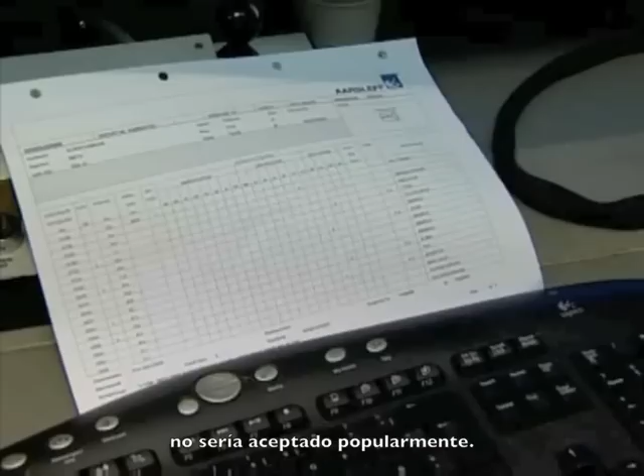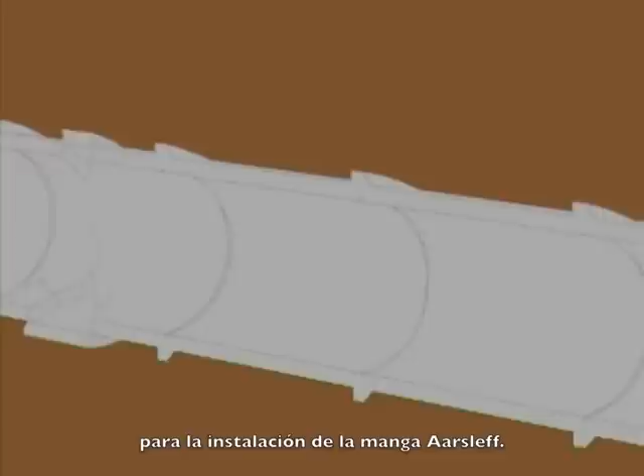Prior to the installation process, the old pipe is CCTV inspected, partly to detect where the lateral pipes are connected to the main pipe, and partly to check whether the pipe is clean and ready for the installation of the Aarsleff tube. The Aarsleff tube is suitable for no-dig rehabilitating wastewater and rainwater pipes, for example. The Aarsleff tube is suitable for rehabilitating pipes ranging from 100 mm to 2500 mm in diameter.

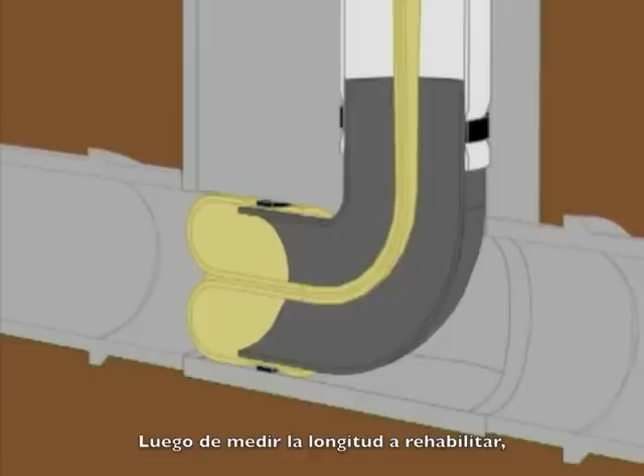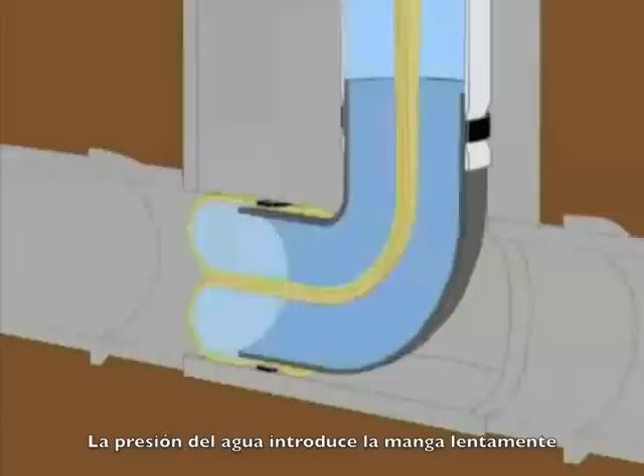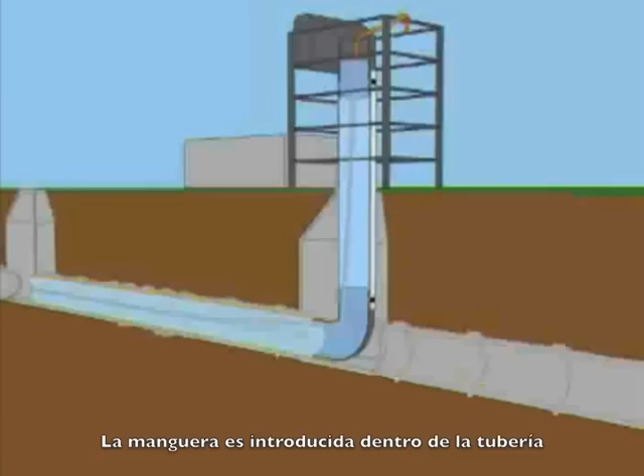In this case, the pipe is rehabilitated from manhole to manhole. After measuring the length to be relined, the impregnated tube is inverted into the damaged pipe. This is effected by water. The water pressure inverts the tube into the old pipe at a steady pace. A rubber hose is installed inside the tube for the hot water curing process. The hose is inverted together with the CIPP tube into the host pipe.

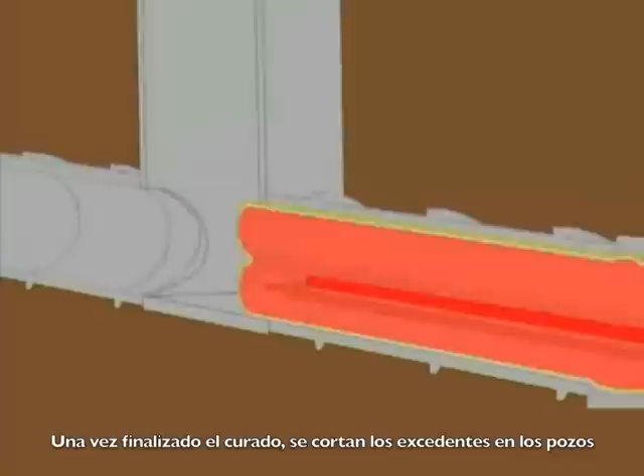Once the tube is in place, it's cured. The water is heated in the on-site boiler by means of circulation. When curing is complete, the excess tube ends are cut off inside the manholes and the old pipe is lined internally with a CIPP tube with a strong and smooth surface that will last for many years.

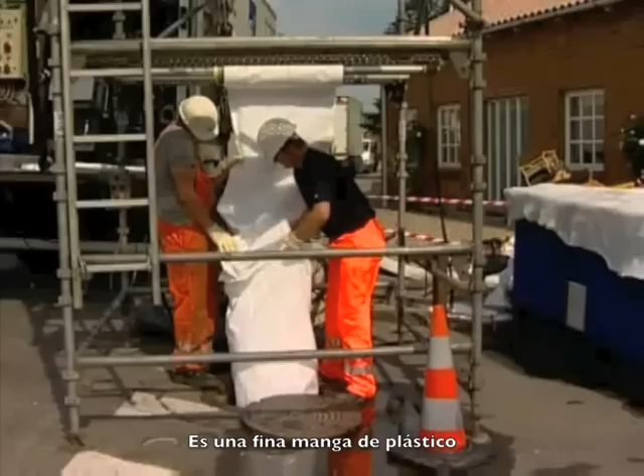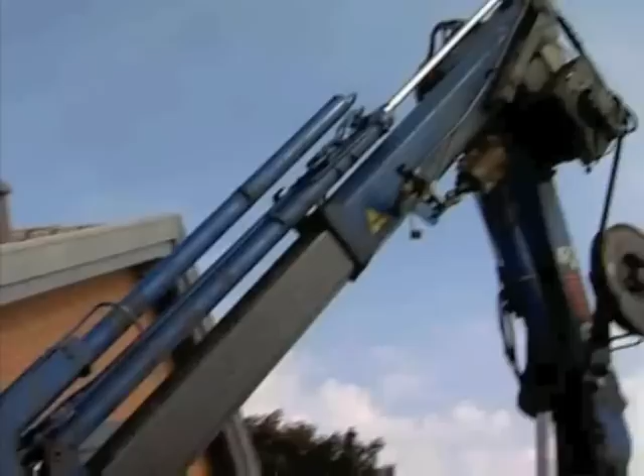First, a pre-liner is blown into the old pipe. It is a thin plastic tube that protects the following polyester tube against groundwater during the inversion and curing. The pre-liner is shown here on its way through an intermediate manhole to the end manhole. The tube was delivered to the site in a crate filled with ice to prevent premature curing.

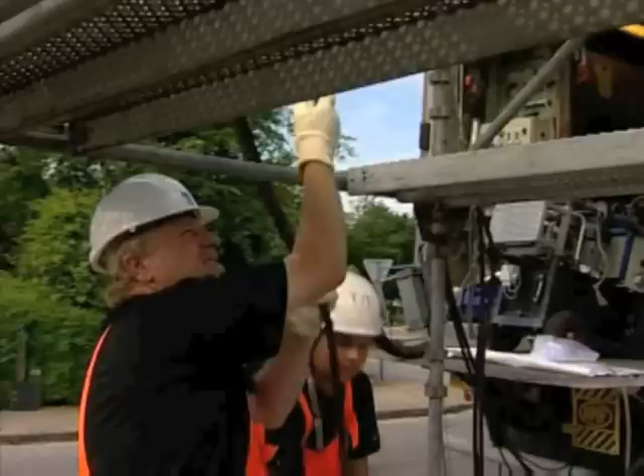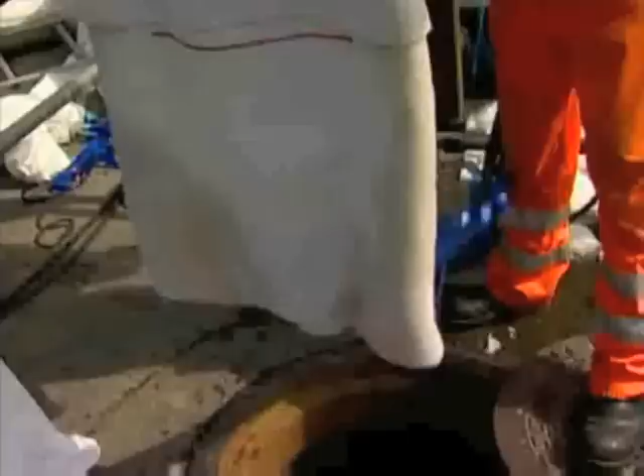The tube is lifted by crane from the container up to the inversion tower and inverted into the existing pipe from the tower. From here, it's guided into the manhole and brought into position adjacent to the pipe to be rehabilitated. The tube is now attached to the top ring from which it's inverted by water pressure down into the old pipe.

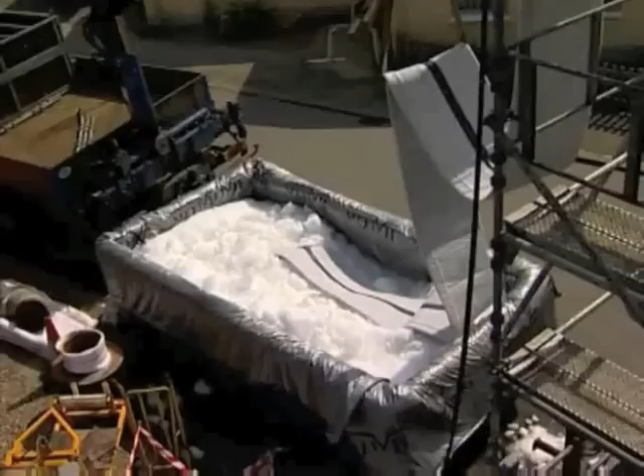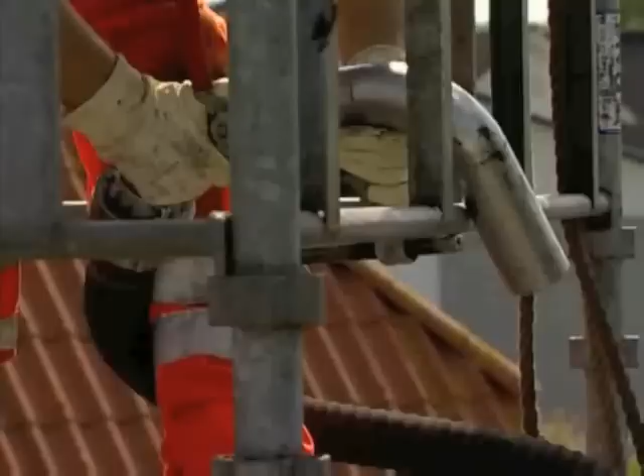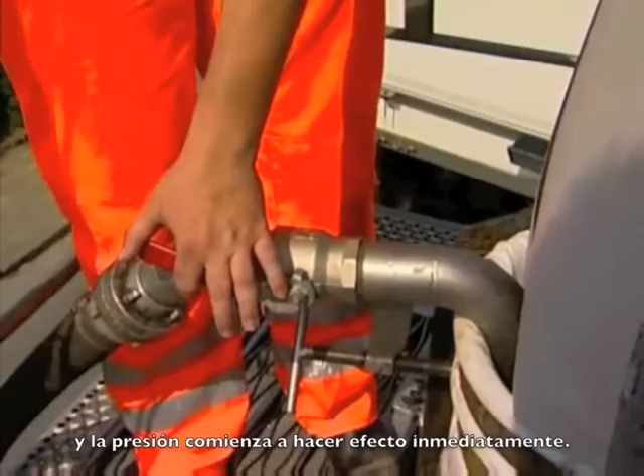The clamps are tightened and the initial preparations are now complete and the inversion of the tube can begin. The water is turned on and the pressure takes effect immediately. A hydraulic conveyor mounted at the top of the tower is used to control the inversion speed of the tube.

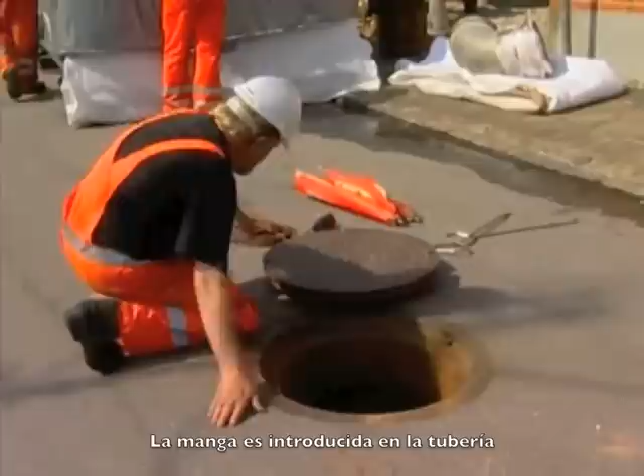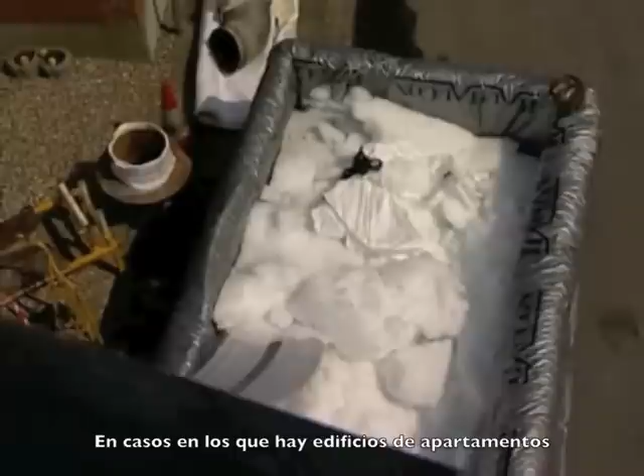The tube is being introduced into the host pipe, sealing off all lateral pipes as it advances. But as this takes only a short time, the users involved will not notice it. In other cases, where large multi-storied buildings or industries are involved, measures to divert discharge water are established. The pressure is constantly adjusted. The tube is now halfway down the host pipe.

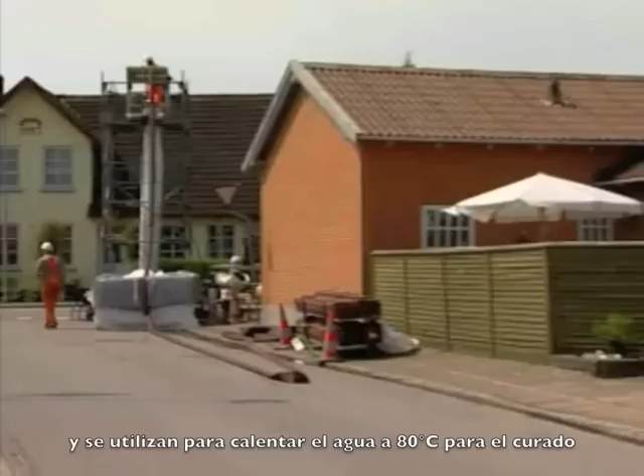The rope, which is tied to the end of the tube, is used to ensure that the tube is constantly kept under the required pressure. Correct, constant pressure guarantees that the tube remains close to the wall of the host pipe during inversion. Red heat hoses are also pulled down the pipe. They're used to heat the water in the tube to 80 degrees to cure the new pipe.

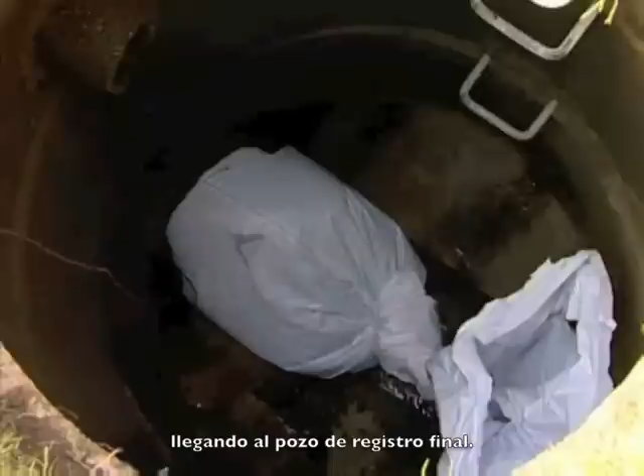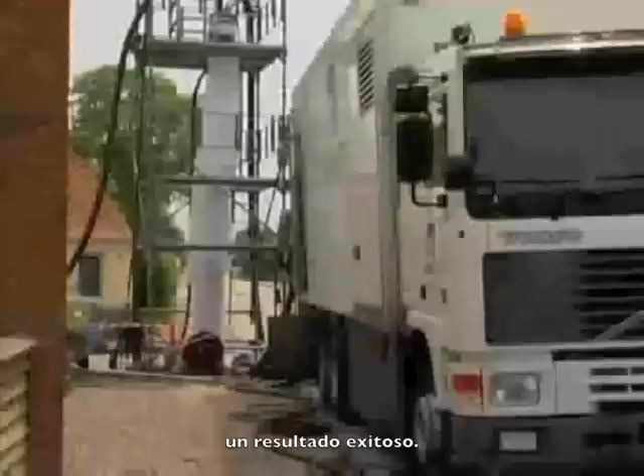The inversion of the tube progresses according to plan, with water as the driving force. And it's now reached the end manhole. A thermometer probe is installed to enable constant temperature recordings during the curing process. The data are transmitted to the computer in the installation van and form part of the documentation for a successful result. The tube is heat cured. Aarsleff brings its own heater. The entire process is monitored on a computer.

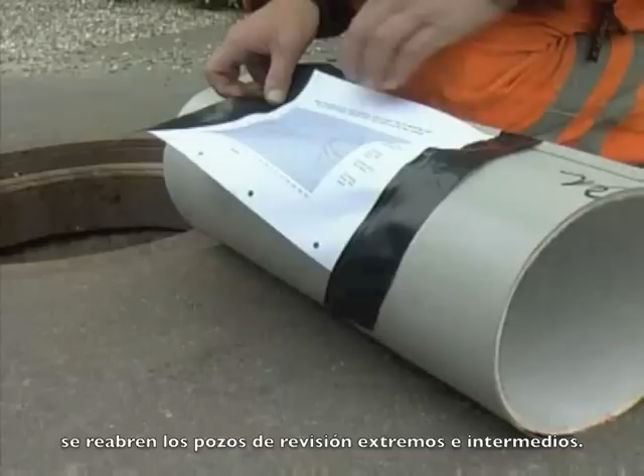After curing has been completed, the start, end and any intermediate manholes are reopened. A sample of the tube is cut off and sent to the laboratory in order to meet the requirements of the Danish Quality Control Scheme for pipeline rehabilitation to verify that it fulfills the quality the customer has been guaranteed.

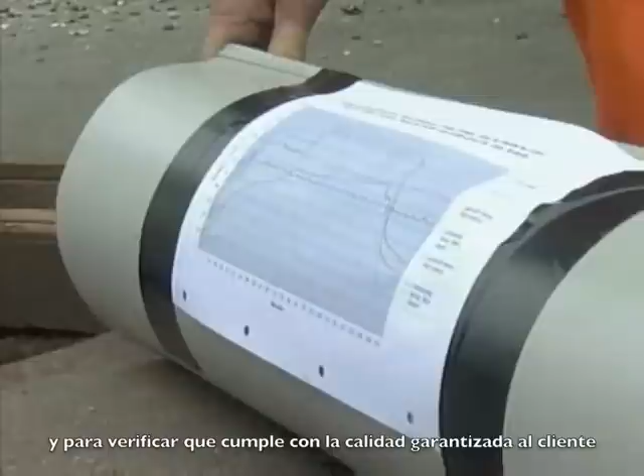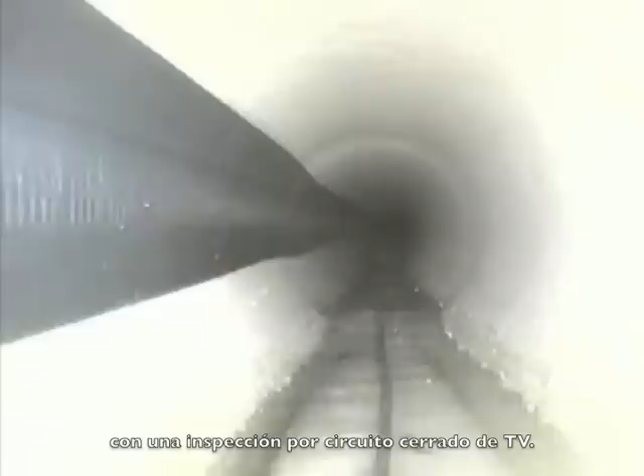All service laterals are now reopened with a cutter, which is remote controlled from the CCTV van. When all laterals have been reopened, work is rounded off with a CCTV inspection. This is naturally carried out by a member company of the Danish Quality Control Scheme for CCTV inspection, known as DTVK.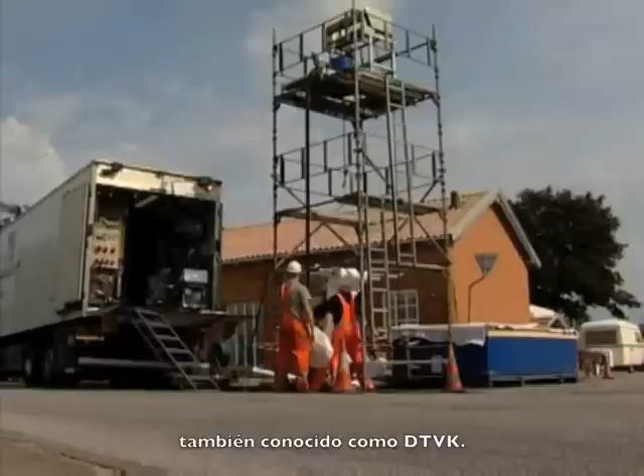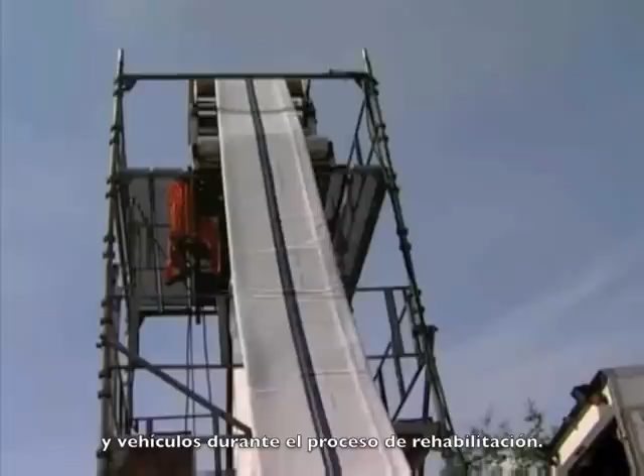CIPP lining requires limited working space on the ground, and passing pedestrians and vehicular traffic can pass unimpeded while the rehabilitation is in progress. It's also worth noting that Aarsleff CIPP linings have undergone 20,000 hours of testing to document a minimum expected service life of 100 years.